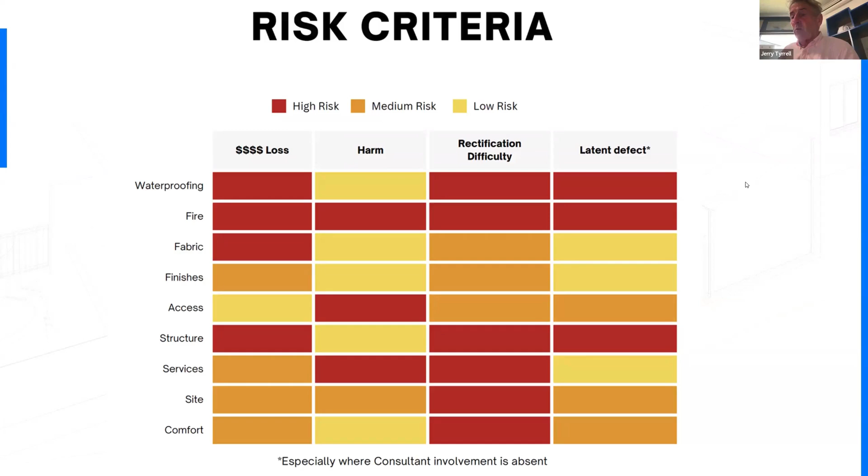But if our mindset just gets clear, and I am going to be direct, we're dealing with an audience both today and all of our users who are pretty cluey. The fact that we weren't taught properly and we didn't have access to this science when we were taught, and we don't have this on ready reference yet, except when you use tools, doesn't mean that if it's a door in a fire rated wall, it doesn't have to meet the fire requirements that are needed.

So it's just so simple for us to be aware of these ingredients when we're designing, when we're building, and when we're following through with whatever area. Today's about doors and door swings. Next week we'll be talking about something completely different, but the same issues apply. All right, let's get into doors.

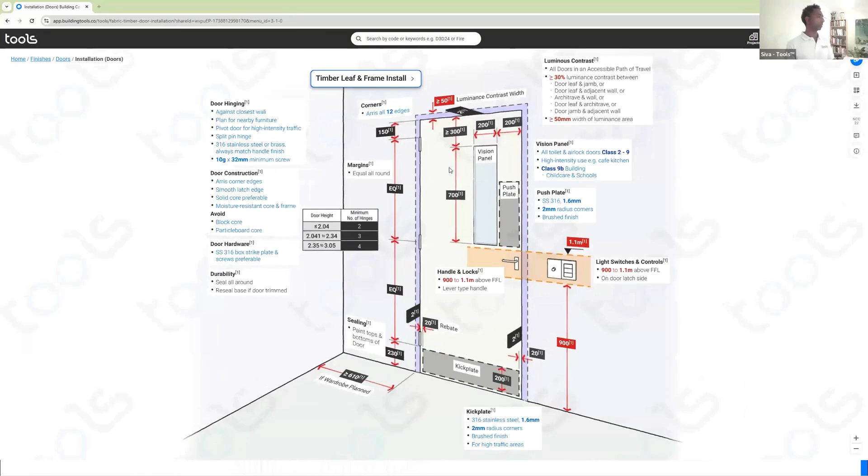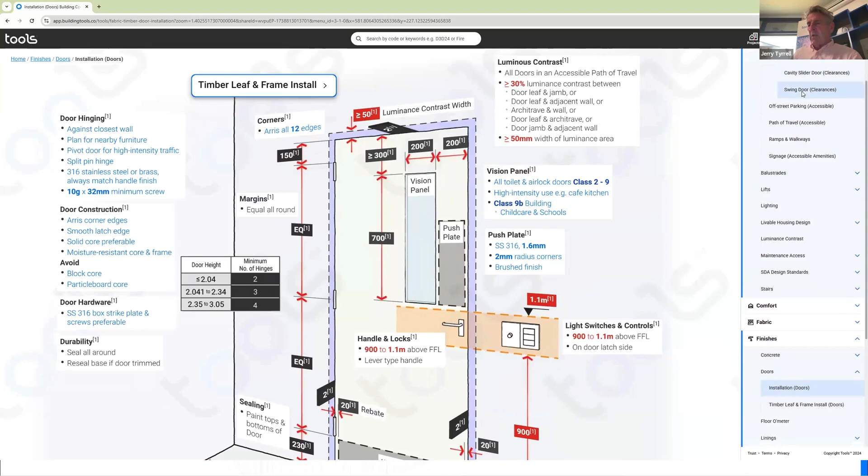So key terms, Jerry. First aspect. Probably the swing, or the handle we used to call it, left hand, right hand. We're only talking about swing doors today. We're not talking about sliding or bifold or multifold or any of that. We're just going to concentrate on the common old garden swing door. So we know the hinge side. It has hardware. We call it quite often a leaf on a swing door. The door leaf.

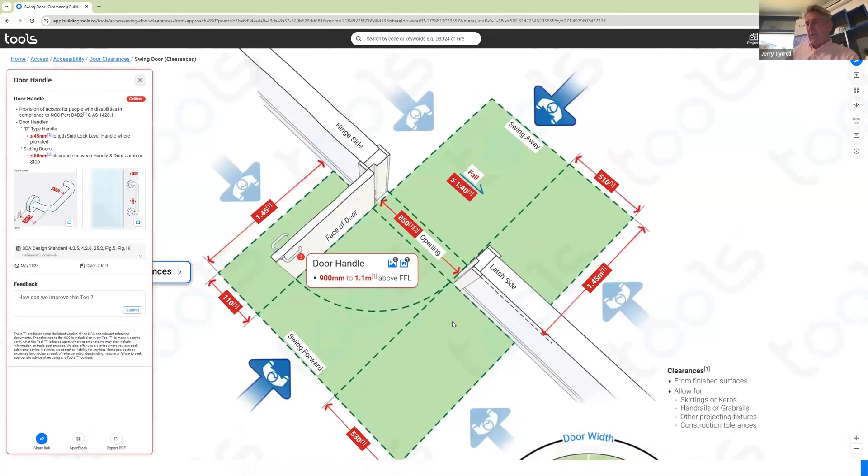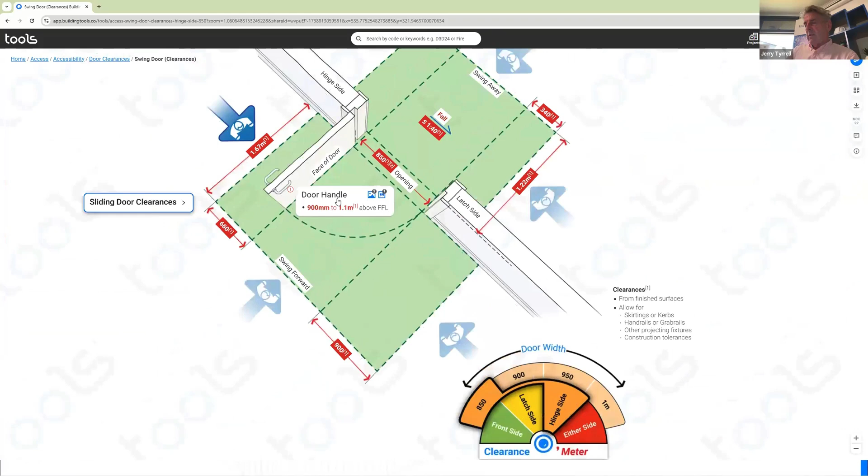Depending upon its complexity, there are lots of different hinge types, which I won't go into today, but you can make a door swing 90 degrees. You can make it swing 180 degrees. We've got hinges that can swing 270 degrees, which allows you to wrap a door round, like an angled parliament hinge. You've got a whole range of different hardware which you can apply. There's kick plates, push plates, cover plates, a whole range of hardware.

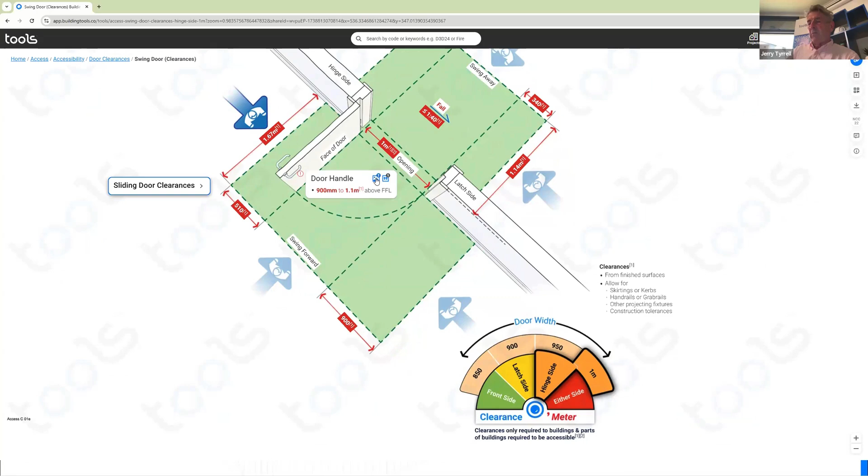So we've got the opening, width, we've got the rebate, we've got the face of door, we've got the door hardware. Again, you'll see with me, I just like the same jargon used.

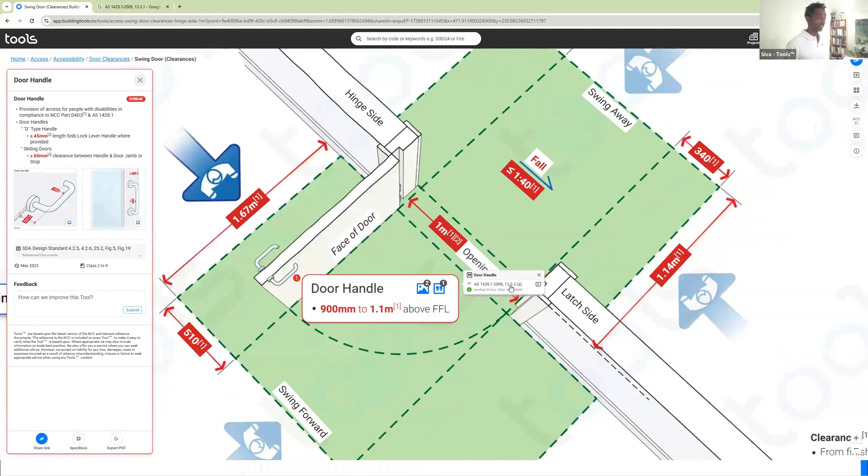Yep. And just one of the key things, for those of you who are newer to tools, all of the red content is code based, and you see the little superscript. If you click on that, you'll get the citation, and you'll be able to copy it. You can go back to your original sources if you wish, but increasingly people are just relying upon this content, and also this little symbol here brings up the citation. So all content on tools is cited.

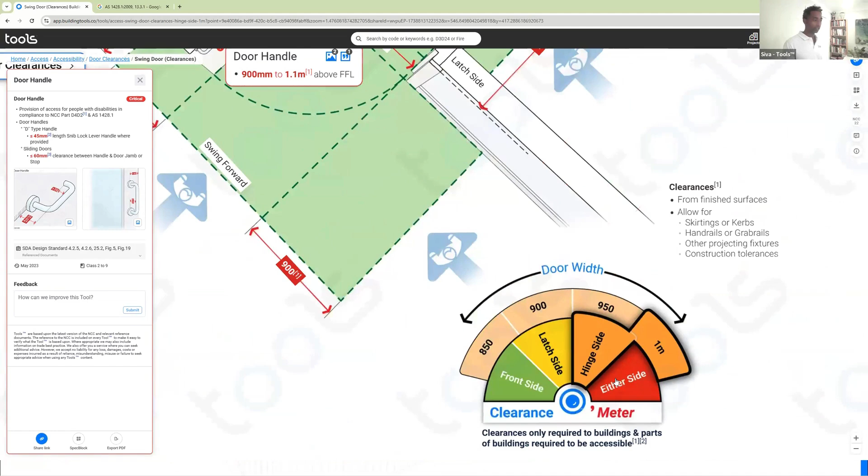And you'll also actually notice Jerry's doorometer. So you'll see these sprinkled around tools. So you'll be able to just set your setting that's specific to you.

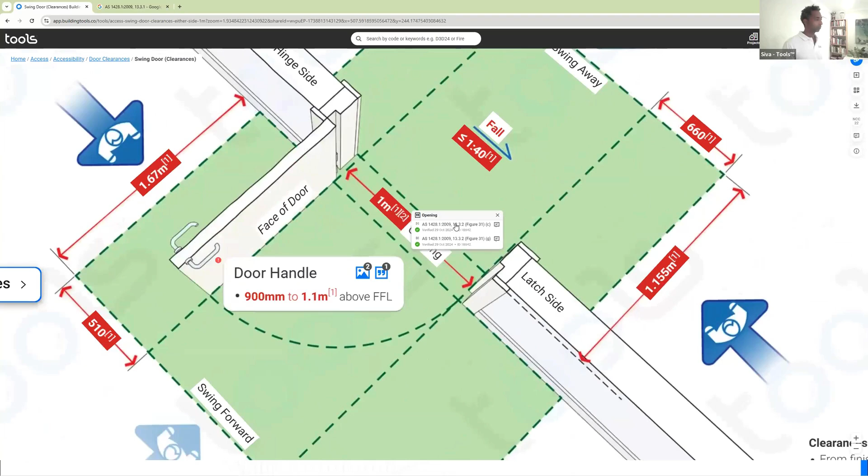We'll get into this with the door swing rules, and these are very defined rules, preset by, I believe, 1428, and the access standards are some of the best standards, because they've given us very specific and very clear measurements to apply with the geometry of what we do as designers, which is really important to make sure the drawings speak to the rules. And then, of course, when we install it as constructors and builders and tradesmen, we know what they are.

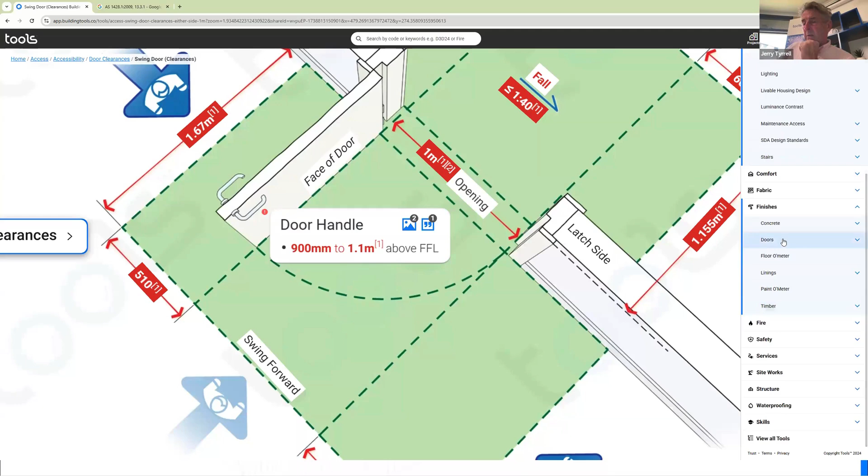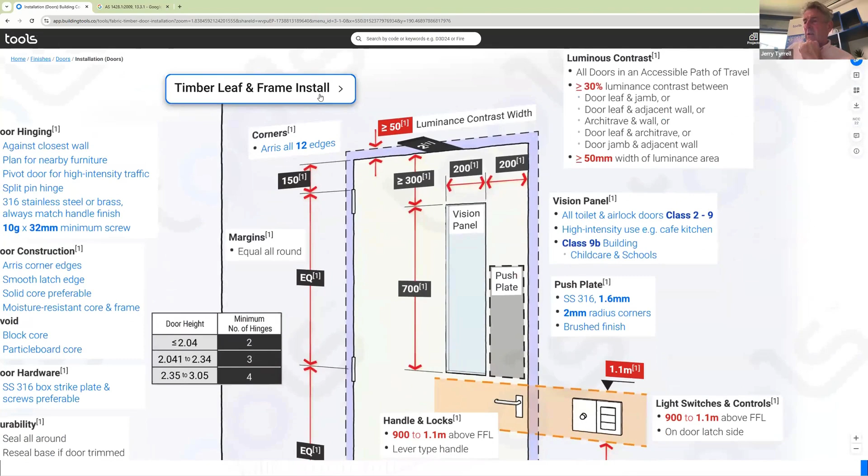But here's some feedback. I used to go and inspect buildings with accessible doors that had to have a clear opening of 850. And what would happen is that the doors themselves would be 850, but they did not give a clear opening to the jamb of 850 when they were hinged open, just because there wasn't the synergy between the manufacturer, the compliance regime, the ABCB, and the designers. And so commonly for about 3 years, the doors were non-compliant.

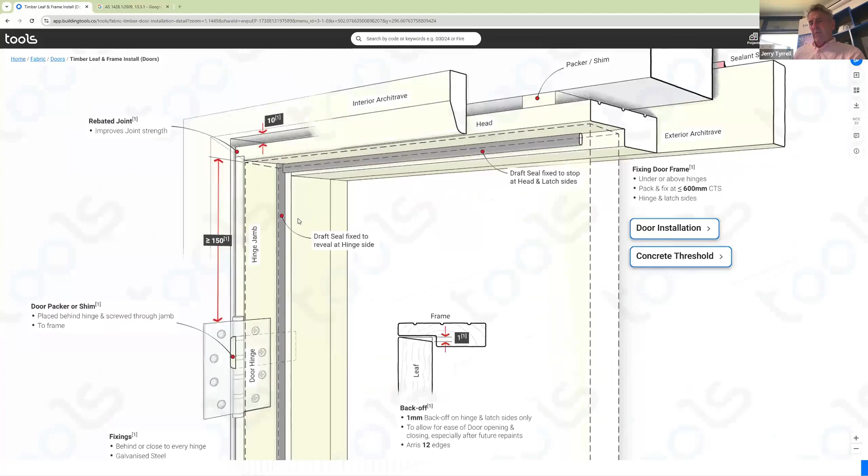So, key terms you've gone through. Let's talk about the science of door swings. The most primitive, the most original doors, and when I say doors, they were openings in primitive times, and they sometimes had a panel that was pushed in.

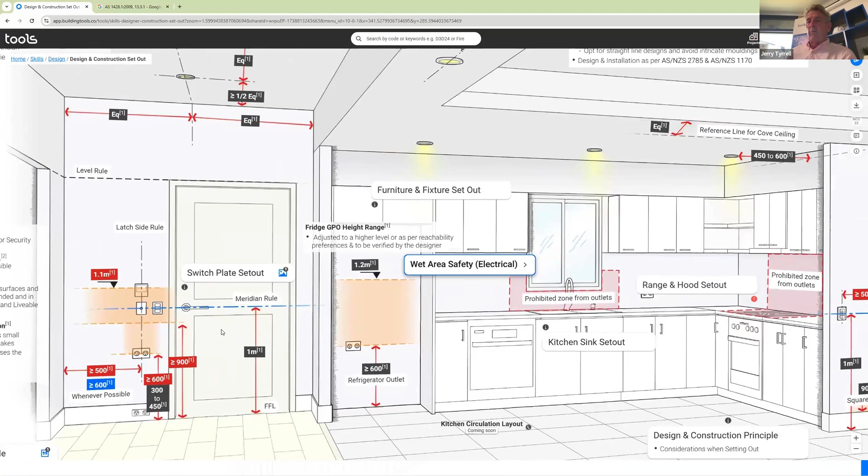So now we've moved on to a mechanism where basically, the principles of doors is that they allow access between spaces from inside to out. They weatherproof, they provide security. And I don't want to babysit any of the listeners today, but it's really an essential part of movement within a building and between spaces.

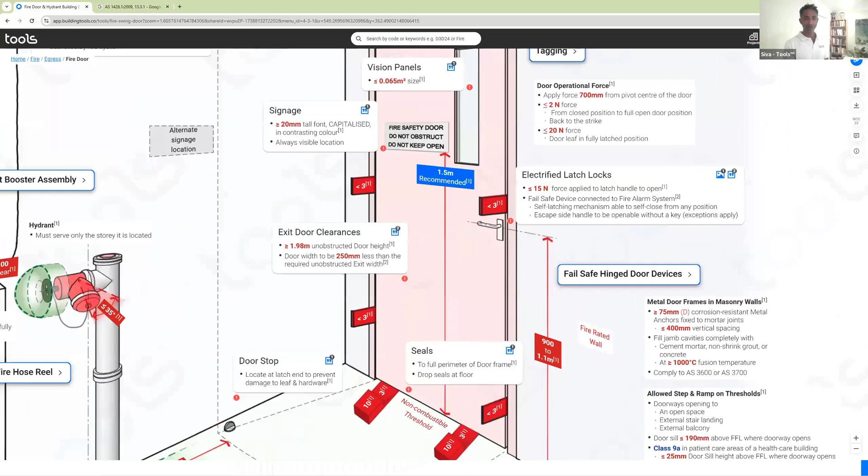Just a quick tip. We have this mantra of find, zoom, share. So if you are talking to someone, whether you're a teacher, I know there's a couple of teachers here. Hi, Lisa, nice to have you here from Wodonga TAFE.

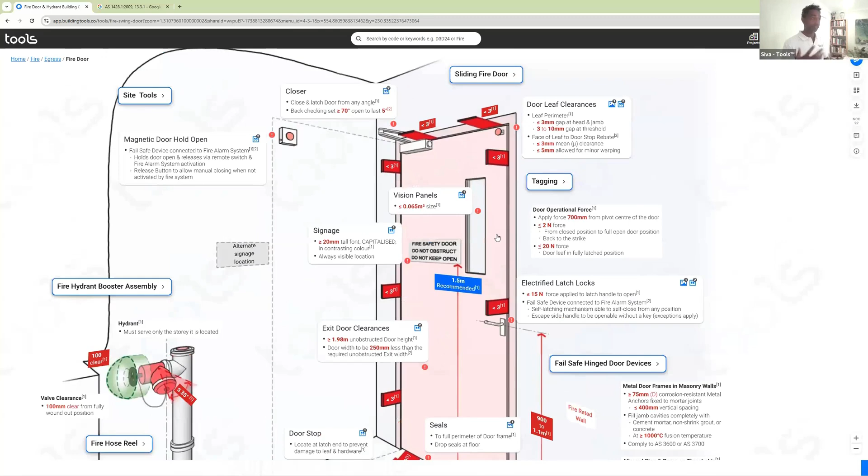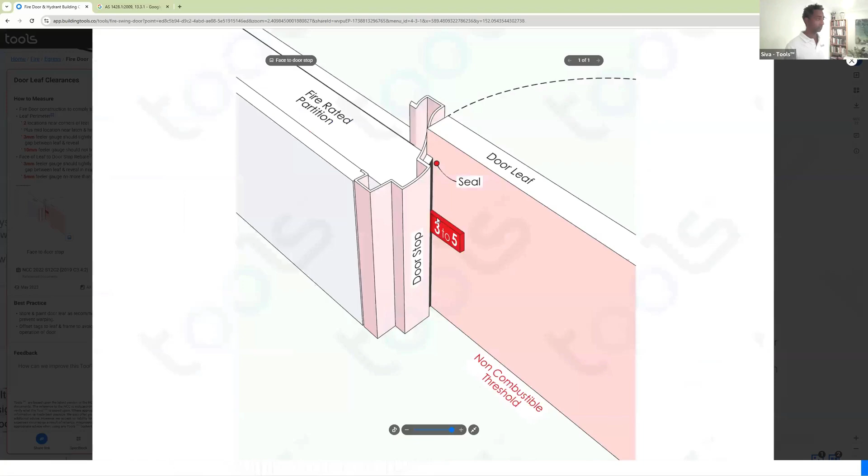So if you're talking either to a classroom or to a client, to a customer, to a contractor, find the tool you want, zoom into the detail. So if you are looking at door leaf clearances, you can pop the little side panel out because that's got additional information in it, as I'm showing you here. It shows how it's measured.

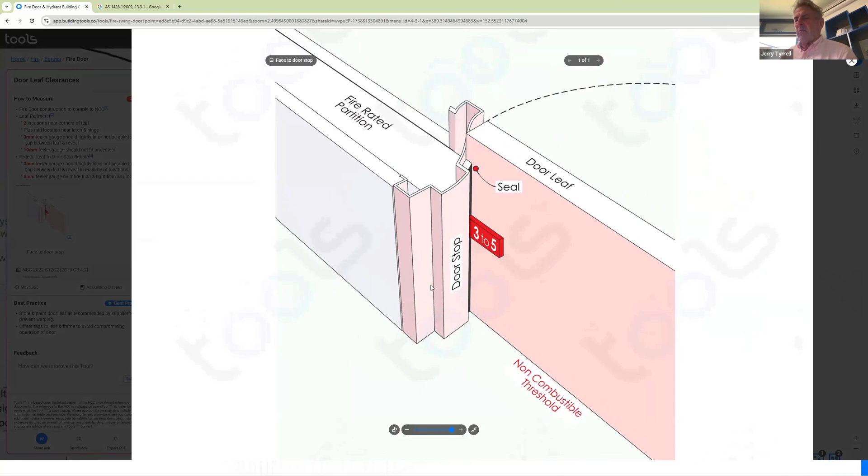It shows that there's a little bit of flexibility for minor warping, but most importantly, I just see doors where people have got a 2 millimeter clearance on one side and 6 on the other, and they bitch to me about it, and I just pull out the tool and basically say, you've only got a maximum 3 millimeters in the main with fire doors. They only make the mistake once. They then make sure their margins and clearances are spot on.

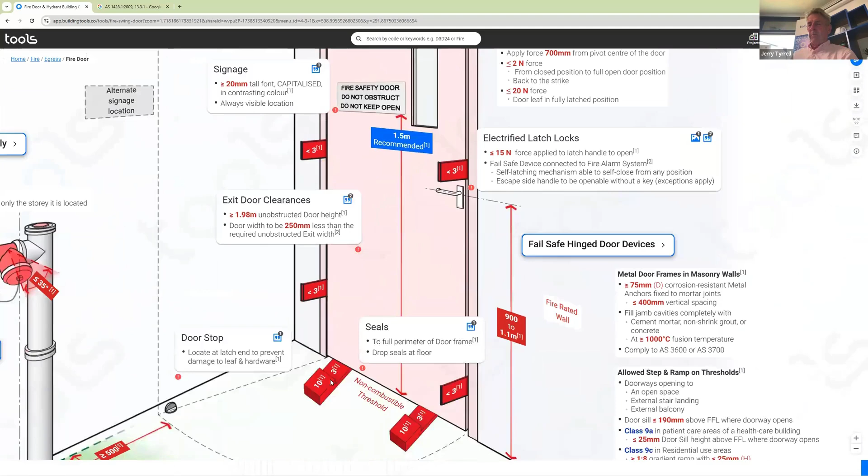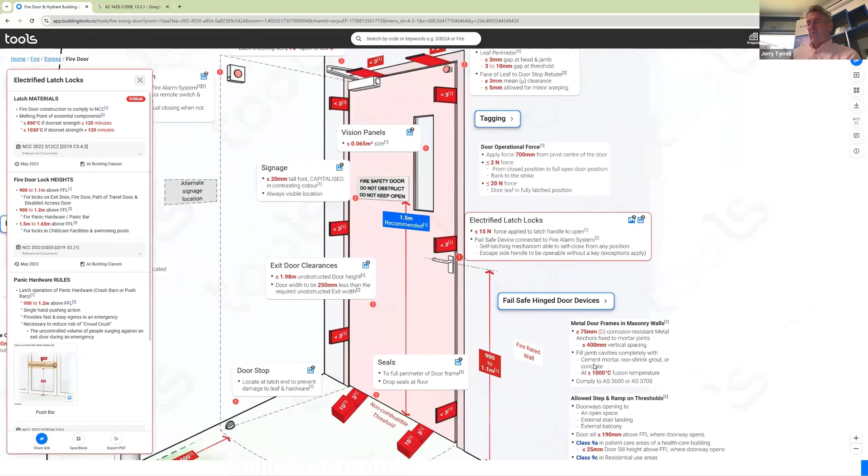Now, the clearance at the base is really important too, and often they haven't allowed for finishes, and of course the combustibility. And we're just talking about a fire door. But more and more, as buildings become more complex and accommodation is aggregated into class 2s and class 3s, please be aware that we'll be seeing more fire doors, we'll be designing more fire doors, and all the rules about the fire protection are important, and the access, nice trip-free spaces, non-slip surfaces, all that integration between different floor finishes become really important.

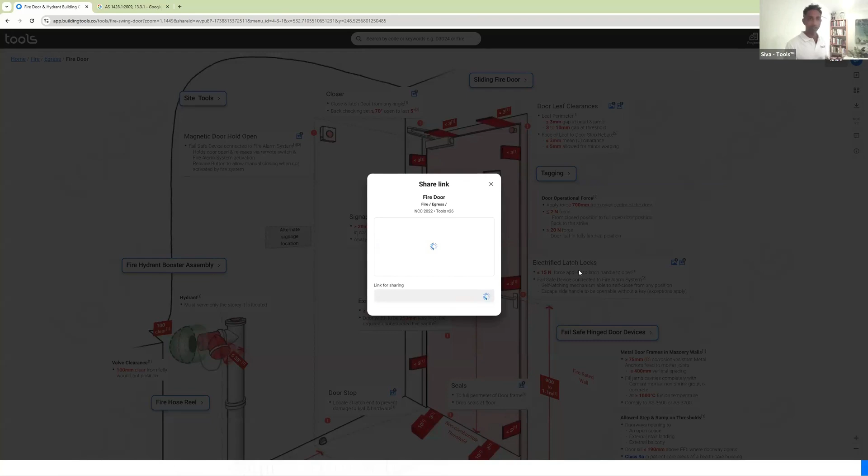For those of you who clicked in the chat, I showed you generating a share link. So you would have noticed that as a recipient, you get the same view. So that can really expedite communication, right? If you're speaking to someone on the phone or via a call, if you're both looking at the same picture. Lisa, one of the lecturers at Wodonga, was saying to me earlier, a picture tells 1,000 words. So do use that share.

The other way that you can share things is the download PDF function. So that's just another way if you want to include it in documentation as a handout, as a printout, stick it up on the wall. It's got a QR as well. So just a couple of ways to add. Now, these are ready to send off now. So quite often I'm using them for educational purposes just on the site.

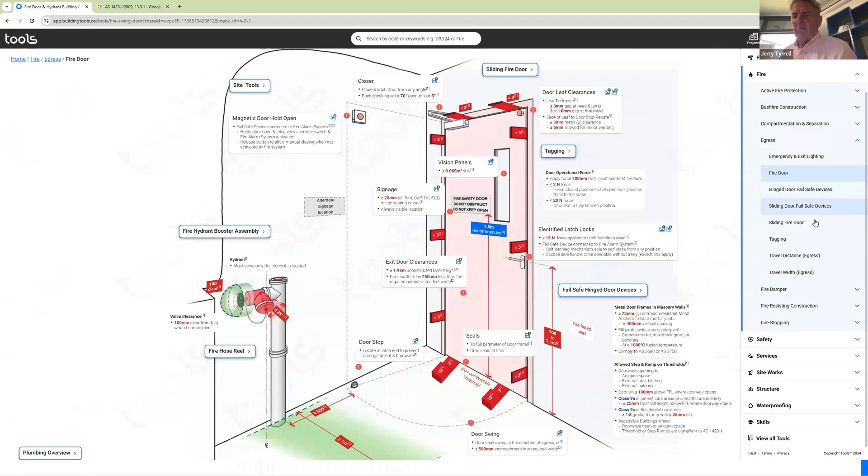But ideally, we're going to be bundling these up into little modules that might go to the science of doors, and then there might be fire door, hinge door, sliding door, balcony sliding door, multi-fold doors. So we may well be bundling those things up, and you will be able to teach to this eventually.

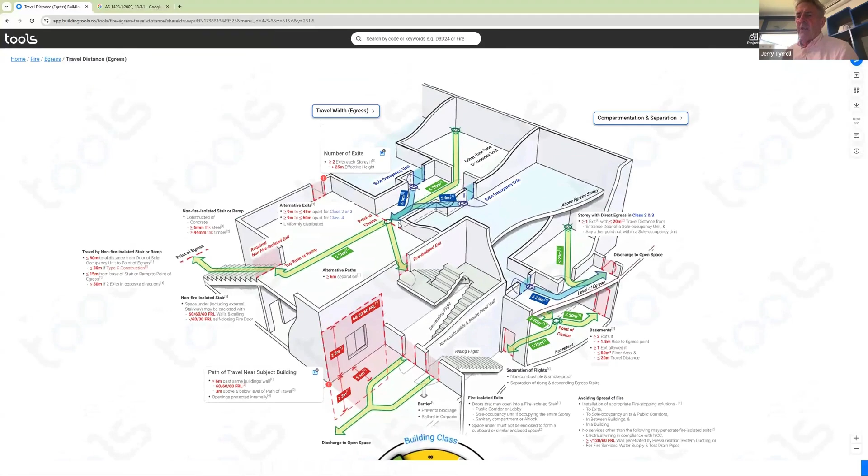You can teach to it on the whiteboard, but ideally you're sending a person who knows about doors something if you're in a business enterprise design group, and if you're a teacher, enabling this by whiting out some of the labels and encouraging people to understand and know the terminology and the definitions is certainly on our radar. We'll get back into doors, but just know that there's also travel distance and travel width, which is obviously part of a different topic, but that information is there as well.

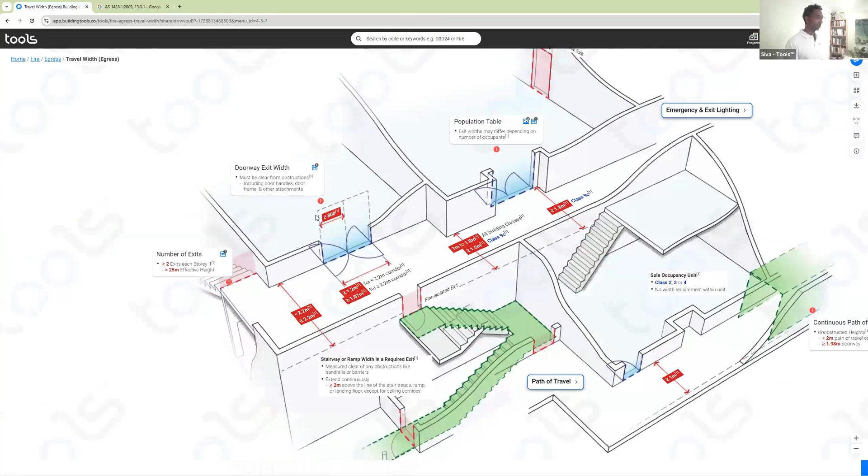So Jerry, if we get back, so we've spoken about the principles. What are some of the most common pitfalls and traps that you've seen out on site? Oh, I just think that often I just see doors that have been placed in the wrong position. It hasn't allowed for furniture. It essentially isn't in the optimum position.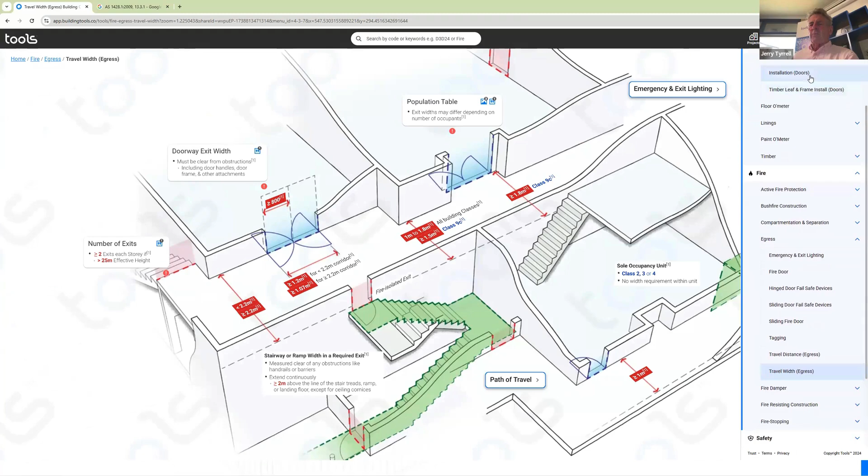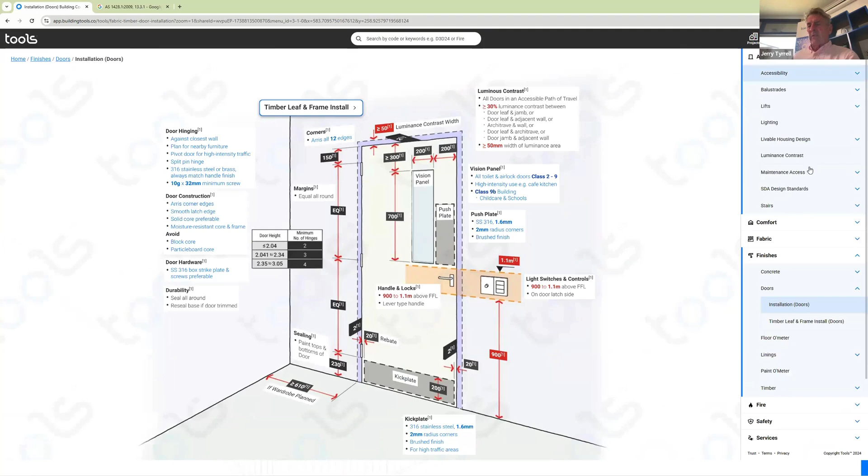So there can be design mistakes made, so for any of the designers there, please consider the way people move. And I shouldn't even have to say this. This is Design 101. So obviously, if it is a single door, then you need to make sure that it's understanding the way spaces work, and the door is quite often a junction between different spaces. Please make sure that it's placed in the right location.

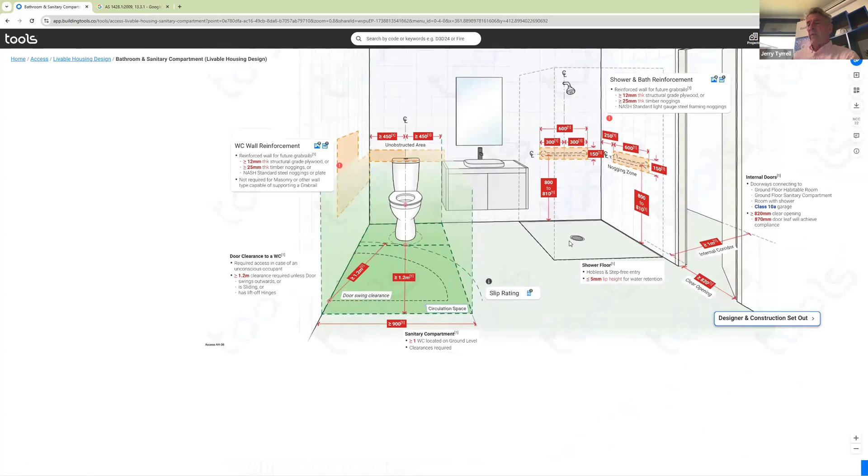To the people installing them, look, the mistakes, the pitfalls are, I've never used a hollow core door. I've never personally installed or specified a hollow core door. I know there are financial constraints, but I've never installed one. I've seen tens of thousands of them. I've seen too many of them with holes in them. I've seen too many where the bottom's been cut off and the core filling is sort of sitting at the bottom without a timber strip. So those type of things disappoint me.

Too often I've seen solid core doors hinged with just 2 hinges instead of 3 hinges. And the use of timber doors externally on external walls that are weather exposed, I don't recommend. I prefer steel faced doors. So there are lots of pitfalls.

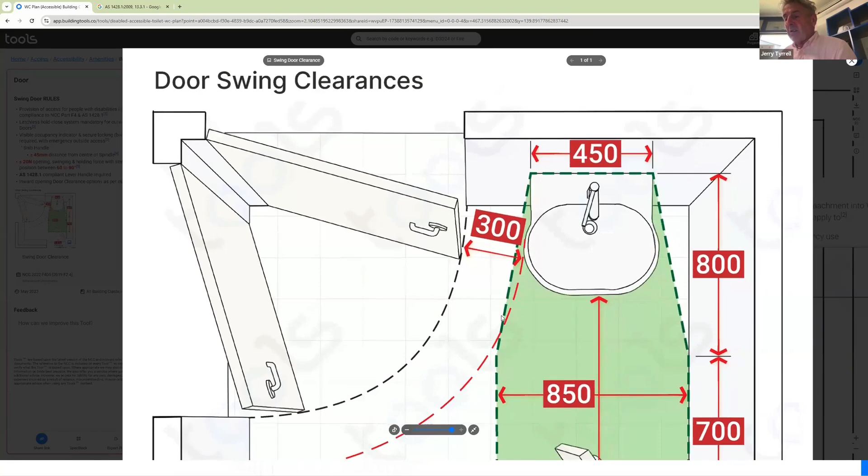I'm not going to go and lecture you guys about the durability side, but ideally you're encouraging your client to make better choices. So they say, oh, I hate the additional cost, but they come back to you when their building is maintenance free, causing much less FM cost. And especially with any of you doing bigger projects, I can assure you your clients love the fact that you've covered their back with future maintenance.

Just having a look around at some of the accessibility tools that are relevant. Where do you want to go, Jerry? Well, I'm probably just going to make sure I've got my run sheet here and I stay on task with what we're doing. Golden rules?

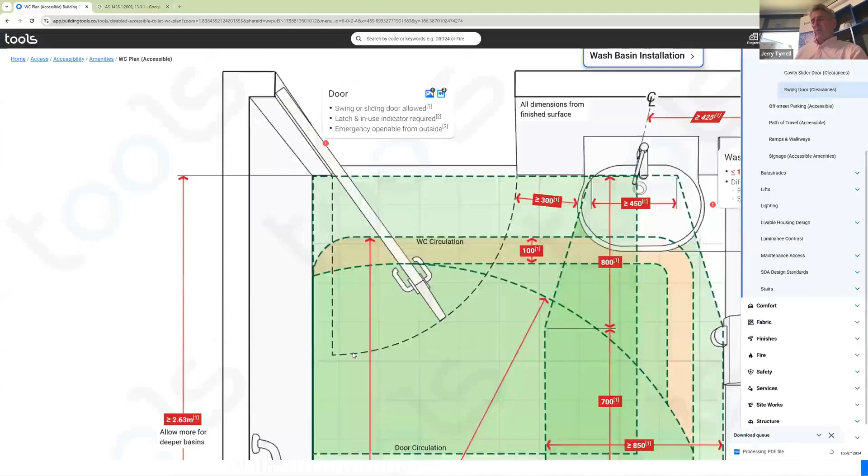The golden rules. I've said here, design dictates the door. So obviously we've spoken about spaces. We also know the use of the space, for instance, if you're putting a door between a kitchen and restaurant, it's a 180-degree hinge door. If you're putting a door from the hall in a Class 2 building to a unit, you want to make sure that both the fire rating and the acoustics are covered. So from the design side, you're always making sure that you're understanding how it's going to be used, and that dictates the sort of door you're using.

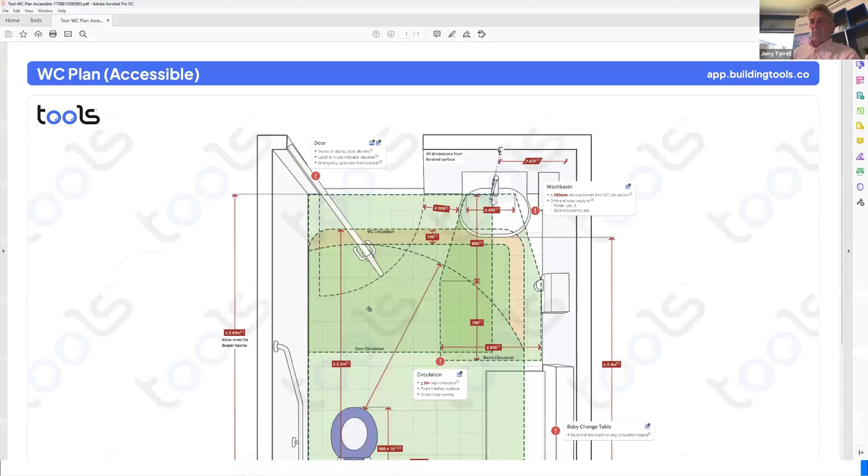Performance-wise, I cannot say how important it is for us. So if anybody's a carbon fanatic and not wanting to waste carbon, this should resonate with you. Every time you make a bad choice and don't use a durable door, then it's going to come back as some form of unnecessary carbon wastage, besides a lot of unnecessary distress and money. Or if we're architects and designers, our work looks horrible. The amount of external rotten, damaged doors that I see of timber construction that were sold to us as fit for purpose is disgusting. I think it's an industry-wide practice, so please choose a durable external door.

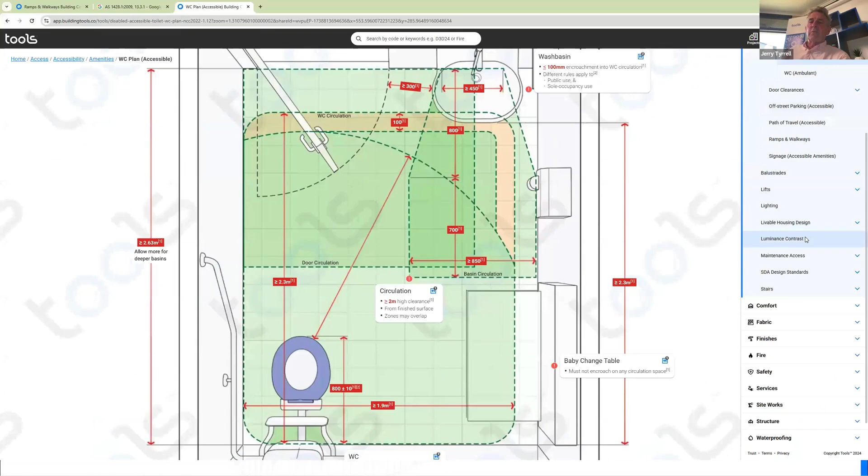Yeah. Just really quickly, you saw it probably takes about a minute or so to generate the PDFs. It's not an instant thing. The system's got to do its thing. But just an example of a PDF, that's it there. It's got the QR in there. So if you do want to print it off, it is also linked. So if you click it, it'll go there. So if you're just sharing it with other people, often one of the main uses of tools is to expedite communication between people. So the PDF.

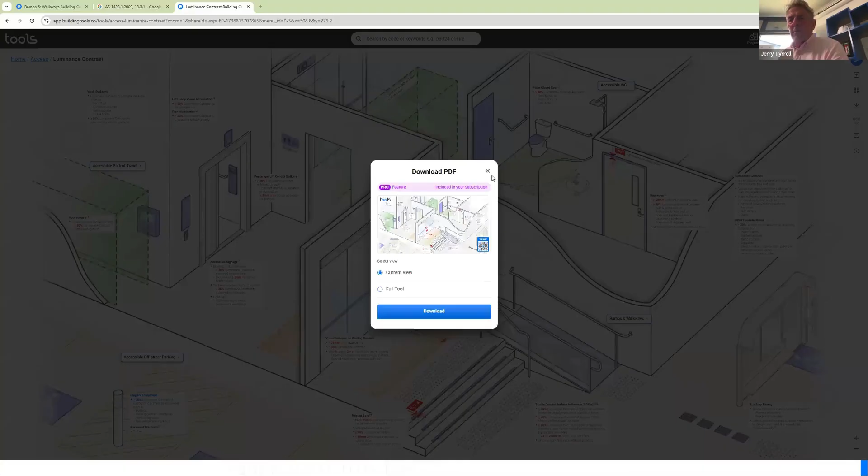And also, Siva's doing what I'm asking all of us to do. We need to nerd into the knowledge that we need in the industry. I think tools provides it, but often now, and I'd say in 1 in 3 cases, there's a luminance contrast requirement with what we do.

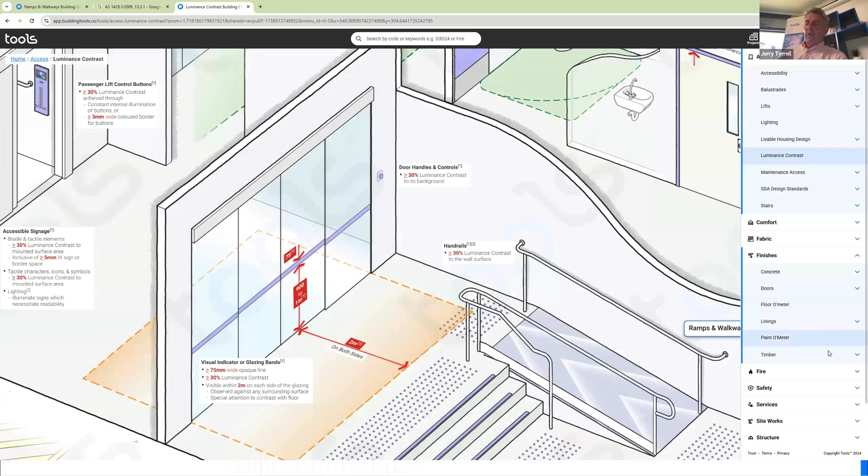So we need to make sure that the door itself is findable to a person whose sight is impaired. So another golden rule: performance and durability. Paint the tops and bottoms of doors. Choose durable hardware. If you're being sold a 316 hardware set, make sure it's 316 and not something that's going to just tea stain. If somebody substitutes anything for you, please make sure that the performance of that product is going to be exactly as you would want.

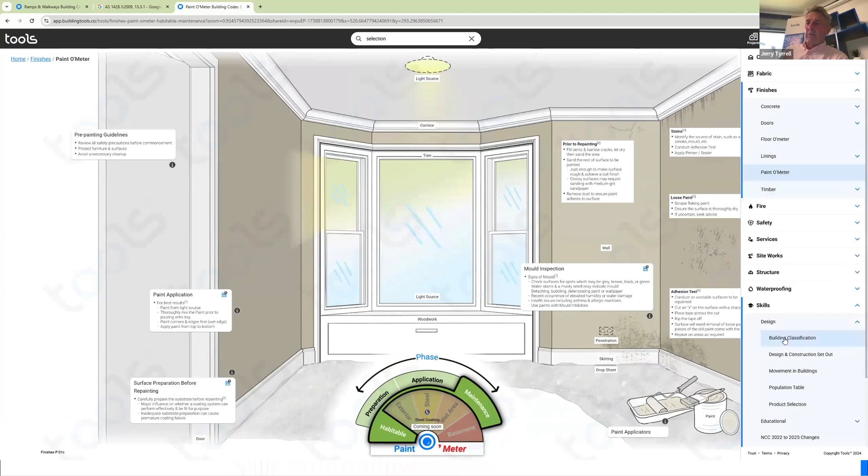So it is universal. One of the things that's going to come through from the shed and all of our Teach Me modules is universal fit for purpose. Please do not take responsibility for a substitution or bad original choice. And if you are going to install something that's been lumbered on you, just shoot an email and say, we don't recommend the use of this particular product next to the sea, or in a pool room, or in a basement area, or in an accessible service area where the handle is going to be seen by high value clients walking past.

Yeah, and there is the selection tool. Even I'm clicking around tools and I keep discovering new things. So one thing I would say is there are a bucket load of tools. There's over 300 of them, right? I do like the selection tool. I think some of this stuff is a work in progress, peeps. We're getting some really good feedback from people giving us tips about this. This is a nice little pick list.

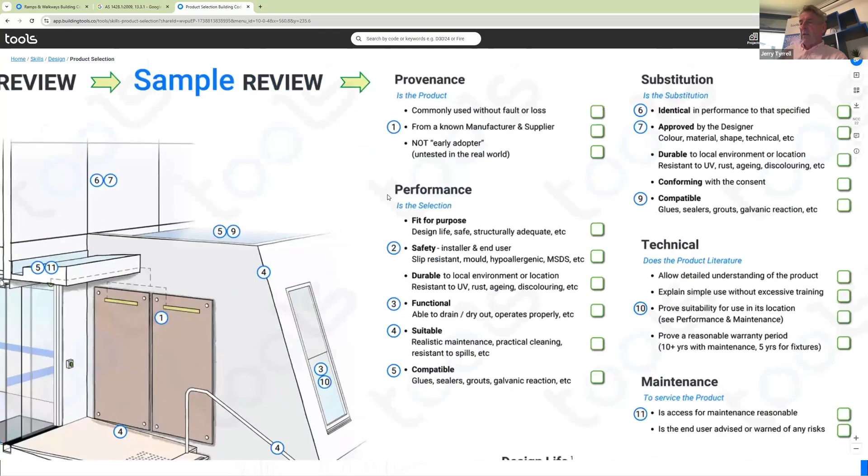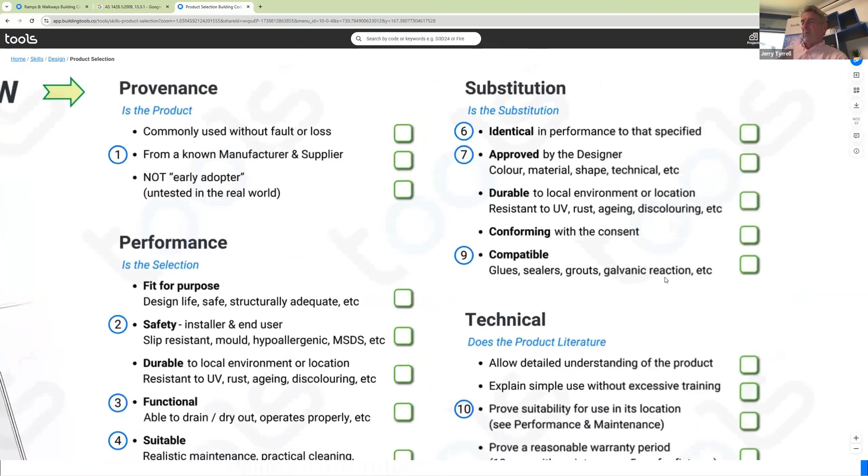This is how my brain works when I choose a product. You might say he's boring as batshit. Well, I don't seem to have the performance problems when I'm specifying or helping a client make a wise choice, or just encouraging wiser choices, because I always think about compatibility between substrates and the ultimate finish. I always choose a sealant that is compatible and color matched and fit for purpose and UV resistant and mold resistant. And you guys are saying, he's a maniac. No, I'm not. I'm just a normal person who likes buildings to last and look lovely and have our beautiful intention to be still really desirable in 10 years' time.

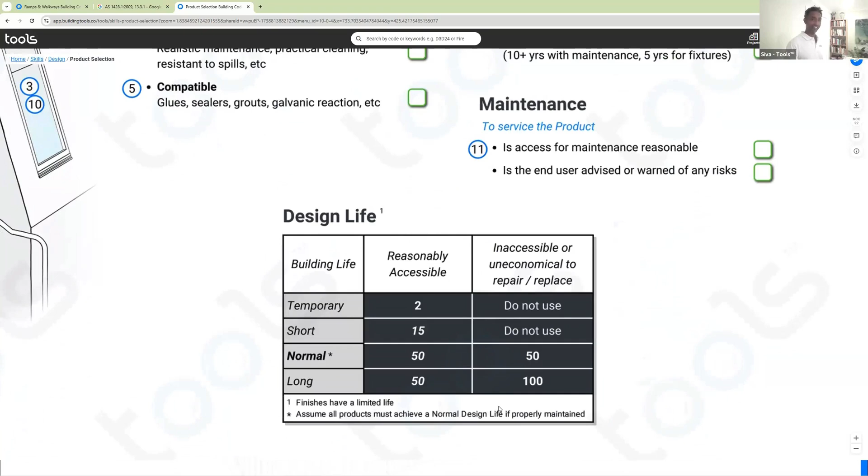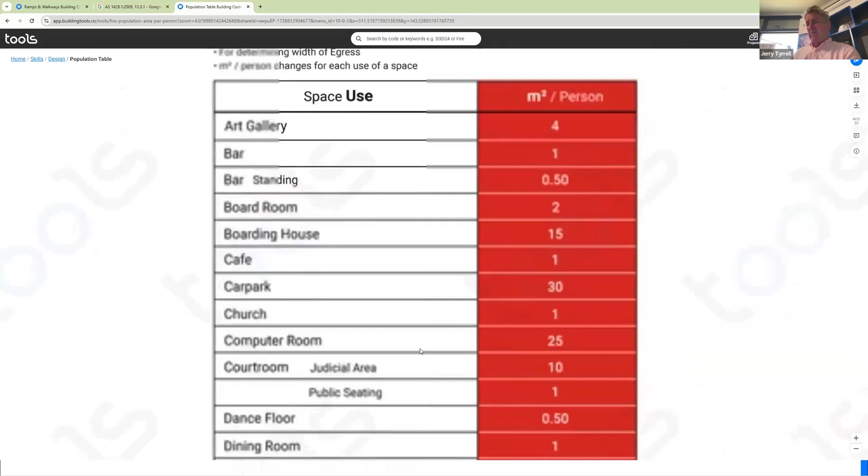Yeah, and a 50-year design life is something you've been repeating. I took a photograph of Martin Place yesterday. I'm going up to see a high value client who owns a lot of real estate. And I was thinking, all these beautiful 130, 140-year-old buildings, they're looking phenomenal. Yeah, they need to be washed down. They're just beautiful.

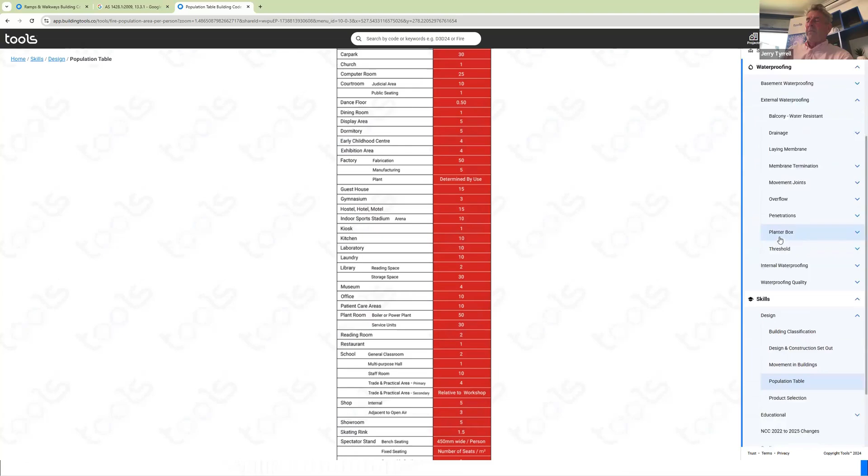So Siva's showing the population table. All of our door sizes when we're designing, and our circulation and our egress, are all dependent upon the number of people using our building. Now, some of us are just doing houses. So a standard 820 door will be fit for purpose coming out of a class 1 house. But let's say you want that door to look really yummy. A lot of designers are using a 920 or 1 meter 20 door, and often they're making it 2 meters 40 tall. There are issues with that. If you haven't put 4 hinges on a door taller than 2.1 meters, you'll probably find if it's painted a dark color, it is probably going to be twisting and warping unless you're very careful.

Yeah. These are sliding doors. We won't get into sliding. Let's not distract the team with the sliding door story. If there's any questions, let us know. We've got a few more minutes, but let's keep going.

We've got the golden rules, good choices. You spoke about selection of materials. It's one of your mantras, right? Yeah, I'm really keen for the industry to step up to what they want, which is not being the fall guy for a bad choice. You'll hear this theme coming through all of the sheds and you've seen it on tools. I think the legislation needs to change because we're still being dumped with a process that encourages manufacturers to give us products without taking responsibility. So anything any of you can do to change that, because I think we should be given products that last and are much superior to the products that are breaking down and causing a defect to be found.

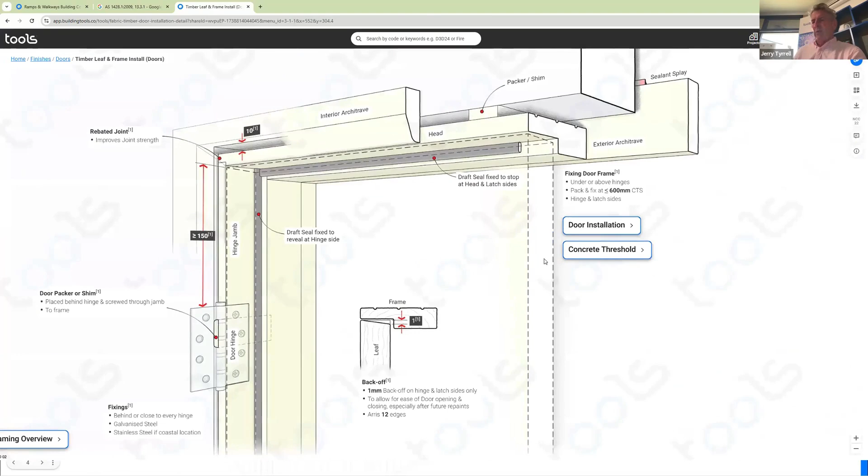And one of the things that you will notice on tools is this idea of integration, right? This probably isn't the greatest example, but you'll see these. If you just go to a hinge door... let me just go back to finishes, doors. So you saw the population table. You will see metal durability. You'll see concrete threshold. This is one of those things.

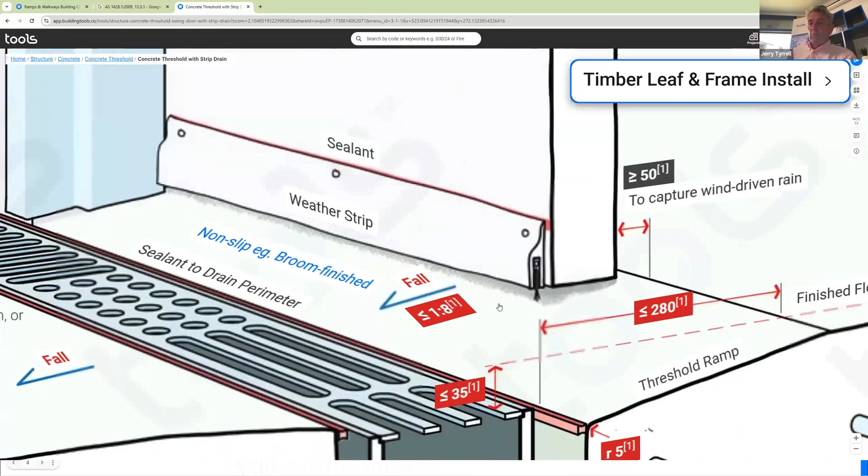I was so pleased when we did this. And it's not even that there's a drain there, because sometimes you can't get the drain. But it's a no-brainer to get a fall in the concrete and or the tiles and a little water bar behind the door. In this case, I never put a water bar under the door because water gets blown underneath it. I always put the fall from behind a hinge door, especially an inward opening one.

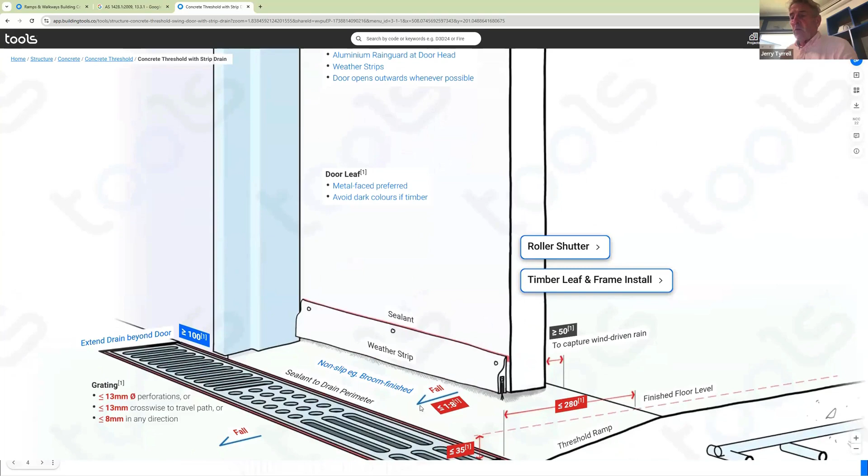So here's a rule of thumb from the old builder bloke side of me. Try to put external doors, weather exposed doors, outward opening. That is the first rule to get external doors watertight. An outward opening external door is easier to keep watertight. But if you can't do that, yes, they've got nice little aluminium thresholds that get a reasonable seal, but always expect them to leak. Always expect them.

That's my dog, Ralph. Did you see some of the pictures?

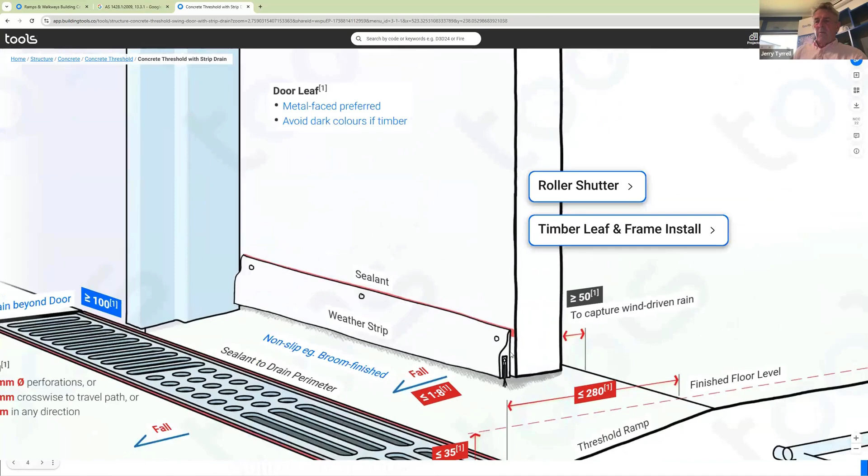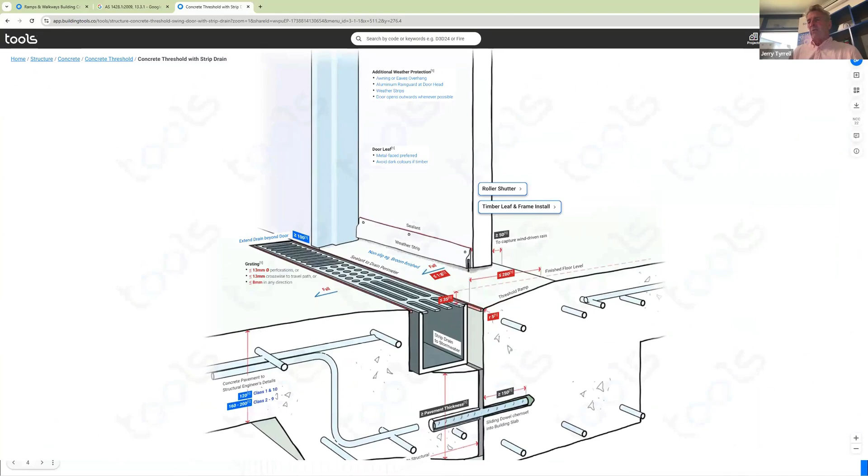So again, you can see that nice little threshold. Get the concreters that you're engaging and the builder used to always falling their thresholds away. So this is part of the integration. You might have a great door, a good choice. The weather strips are on, but the threshold hasn't been thought about because we've been taught not to integrate all the skills needed to deliver the composite of the door and the threshold.

Yeah. Ralph wants to join.

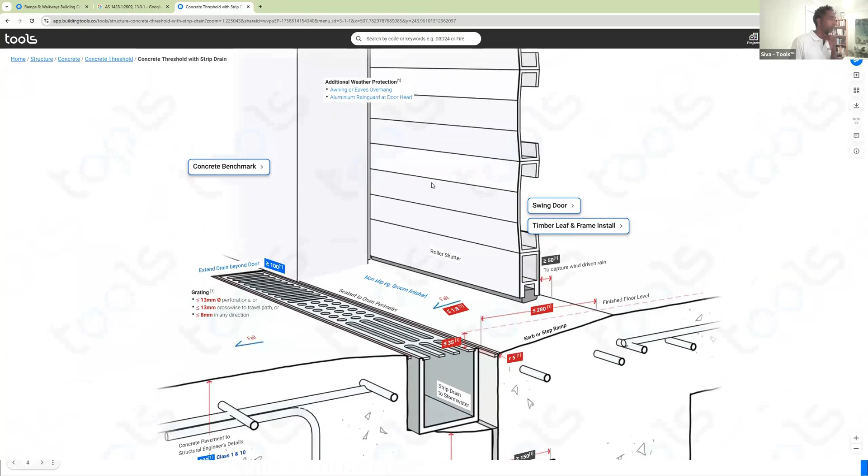So look, that's the integration aspect: all of the tools that you can jump through. You can see on screen there that these here really just take you very quickly through to another version. So you can switch between a roller to a swing door. But integration will go to the fire door, to paint durability, to metal durability, to a whole range of different things that we need to consider.

So for example, if you're building stairs, you have a landing which has got glazing, or you've got a fire door, you can very quickly... You've got a door swing rule from the swing of that door. We haven't gone to door swing clearances yet. We better quickly do that because, and I'm going to mea culpa, I am not doing a lot of work with door swings with 1428.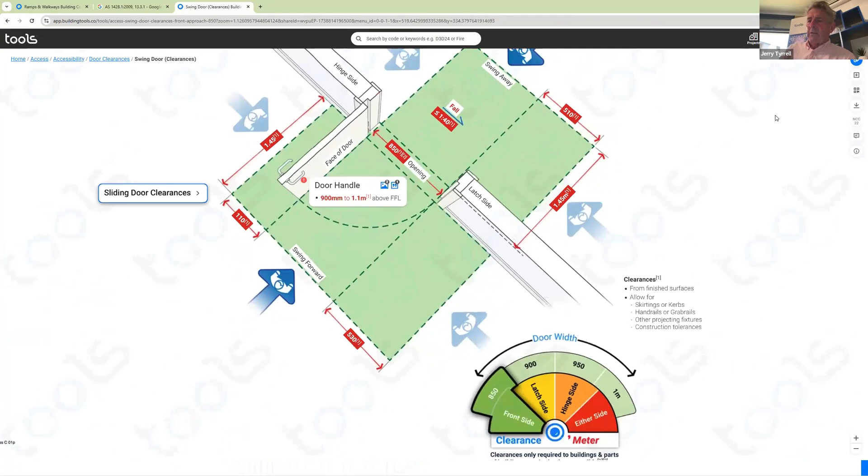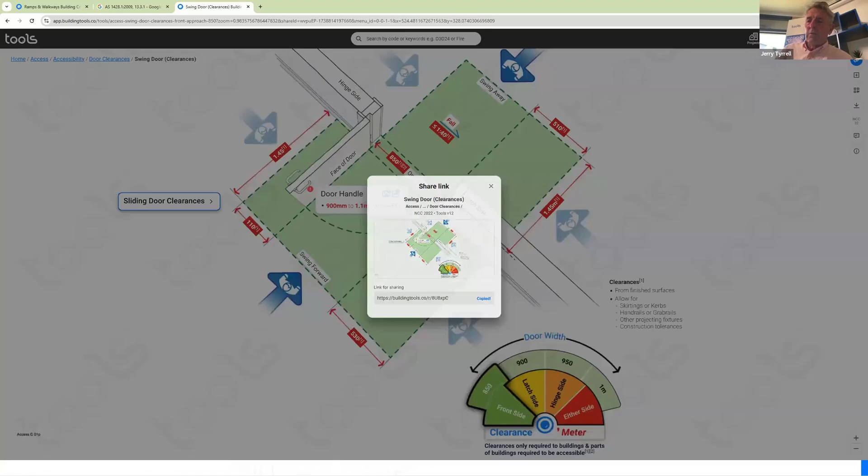But if we go to that, what I want you all to know is that this is here. We've got a Clearance Meter. It tells you how much clearance you need on the latch side. It tells you the size of landings and the spaces that need to be left. It's quite rigid, and it's good because it allows the dignity of people who may not have the mobility that all of us in this room have to use spaces and to use the swing door effectively. And the access consultant will require you to meet these requirements when you design and install it.

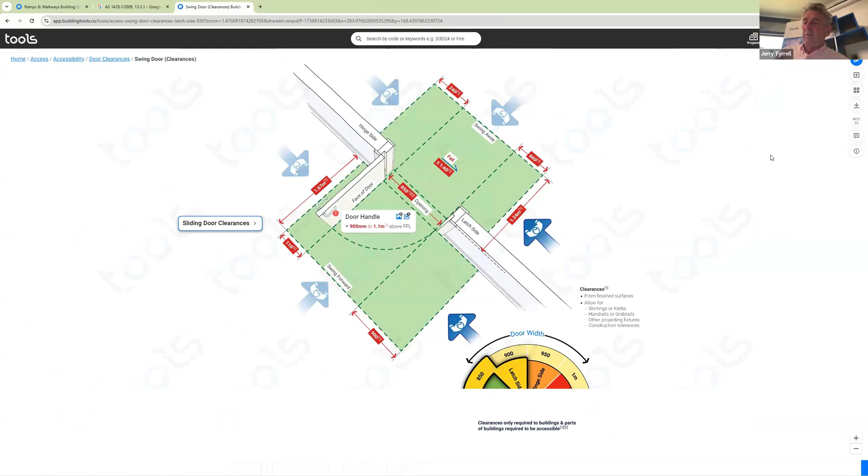So why not have it there on your phone? I'll just double check. If the concreter wants to move the curb 30 mil, then you'll say, no, we can't do that. Just a couple more tips.

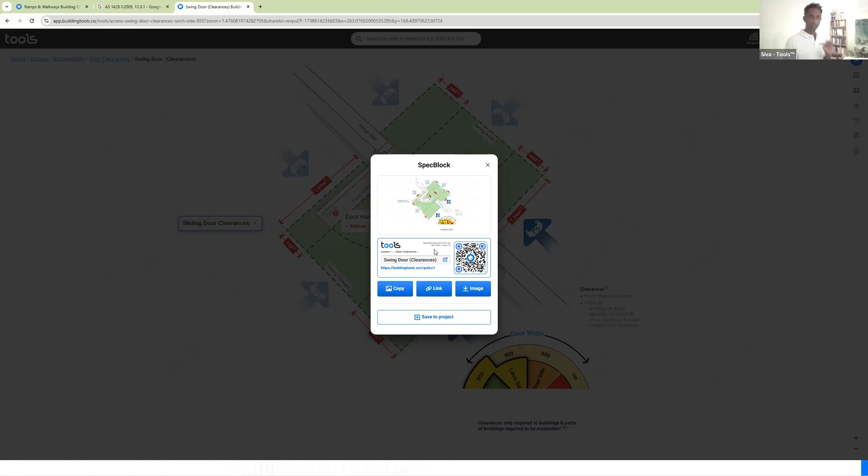The SpecBlocks are useful. Increasingly, we're seeing them on plans, on documents, on reports. So it's a nice way you can copy that and paste it on. If it becomes a printed document, they can always scan the QR, or if it's a digital document, they can click on it. It needs to be linked. But you can grab the link and the image from here. So that's one way, or you can add it to a project as well.

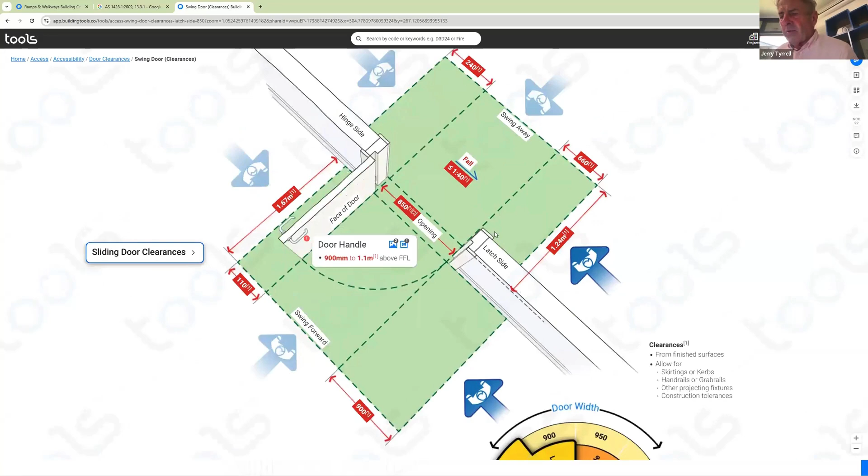So we've got a specification product which is under projects, but you can add it and create your own projects as well. And here's a tip too: you may not have documented every single specific door and door size and door swing, but if you refer to tools, it contains it. So they're still going to be bound, even if you haven't documented, and you say that the work shall be in accordance with tools and or every other documentation rule set, then it's going to be trapped.

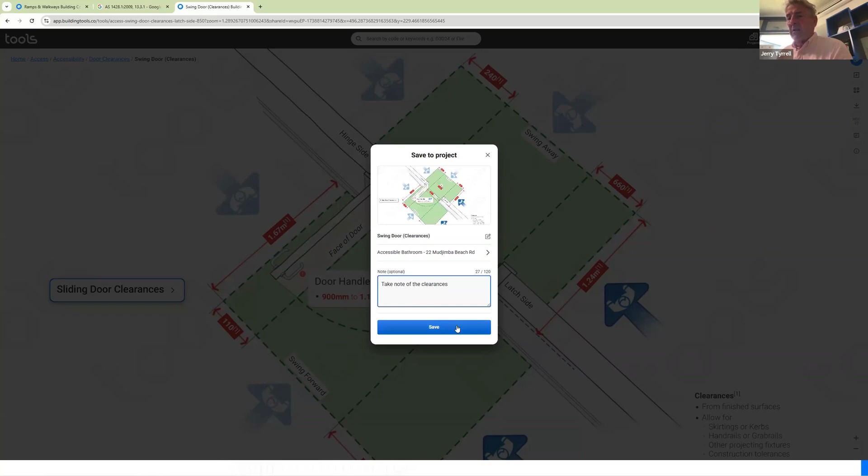If a person doesn't put the minimum size of landing, then you'll be able to refer to it in tools and show them they should have got it to this dimension. Yeah.

Excellent. I think that is about that.

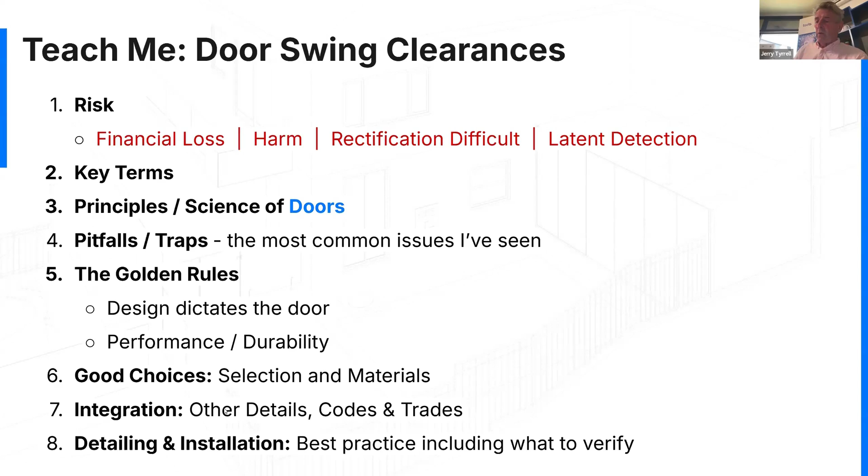Detailing and installation. So when you're detailing, Jerry, or installing, best practices and what to verify, things you should look at. It would be nice to probably interrogate all of you there, but I was taught I arris all 12 corners of the door. You know, I use 3 hinges on solid core standard doors. I paint the top and bottom of doors, and it's just relentless. I roll and lay off the doors. I paint the edges of the doors first before I roll the face.

So there are a real set of rules that we all should have been taught as part of our training as designers. Even if you've never painted before, you should be told the basic rules of making sure that your door is going to last. I'm not a fan of timber external doors, so please do not specify the block core fill doors. And in my opinion, I never specify a timber door that is sun exposed and weather exposed.

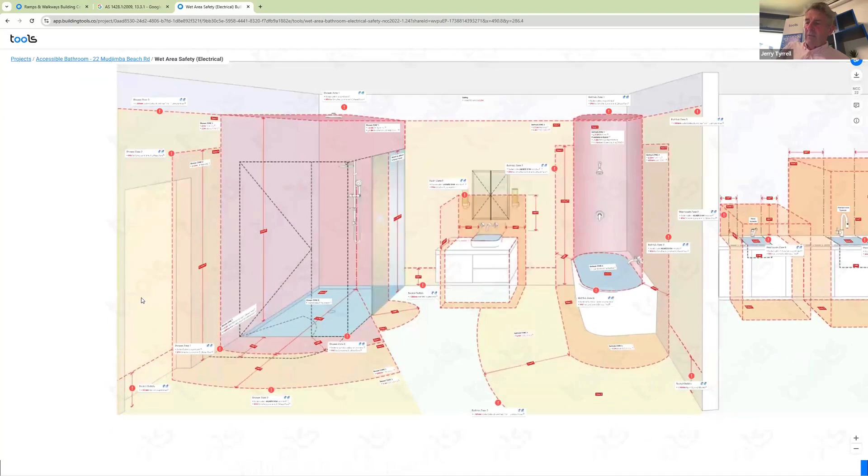So it's a metal face door, and then there's a whole raft of durability issues with metal face doors. So that would be the topic of another conversation, but certainly if it's a city building that's not close to the sea, a Zincalume face door is fine. Bushfire doors, I'm sorry, the Zincalume can't turn around the reveals. So the bushfire doors have got a metal face, but because of transmission of radiant heat, that metal face cannot return around. You've just got to make a really good call.

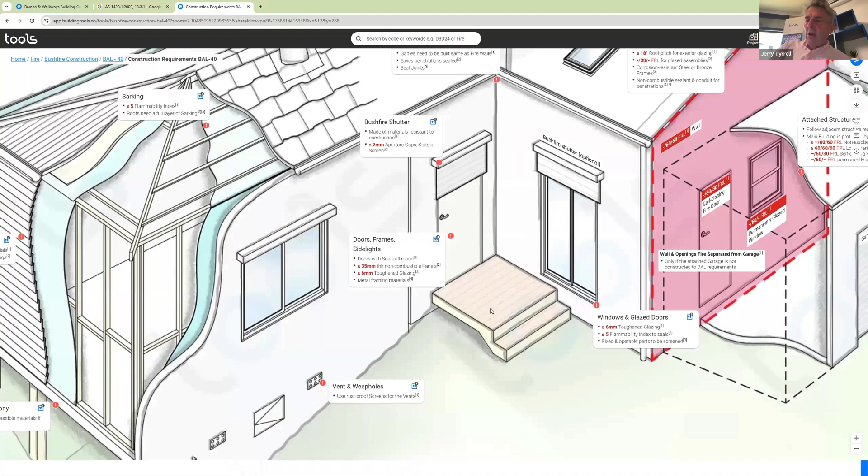And I say to anybody who knows Hume and Corinthian, improve your core product, peeps, because I'm seeing unnecessary failure on doors from major suppliers who've got the best of intentions, and I don't want us to be carrying that can anymore.

Yeah, so we're pretty much out of time, but if you haven't before, check out the bushfire construction tool. You can set all your different BALs, and all the content dynamically updates, and there is a bit of information on doors there as well. It's adorable. It's adorable.

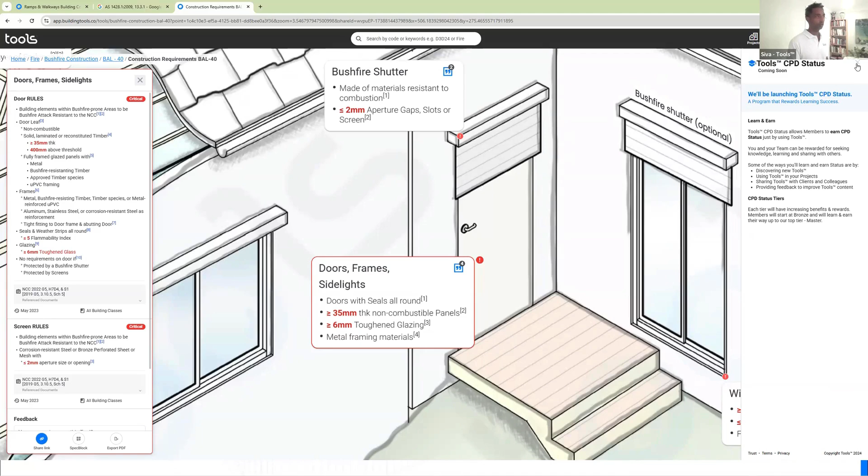To all of you listening, I commonly travel an hour and a half up, and I hear stuff and it's not consolidated. It's off the cuff. I'm sorry, I don't rate most of the CPD that I have to do. Most of these little modules are almost like a full semester course. As long as you refer to the core tools there, you get to know where they are, and you stitch them together whenever you need, and you share them with people who are going to make a mistake on your watch.